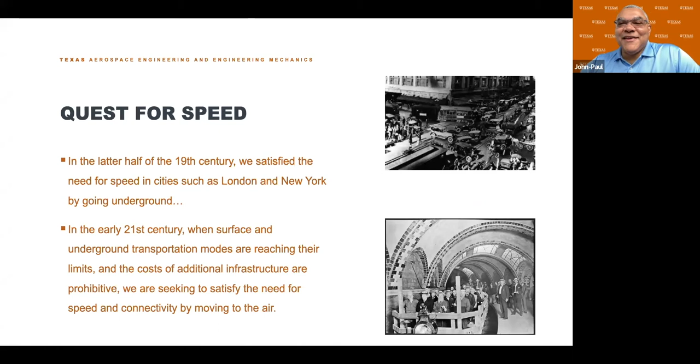Imagine how hard it would be to manage thousands of vehicles flying over your local city, everyone not only transiting people but cargo, with everybody wanting their different packages delivered. The companies that operate them are going to need similar back-office infrastructure like airlines do, for maintenance of their vehicles, to make sure that if something happens the passenger gets reaccommodated, or the cargo gets to where it's going.

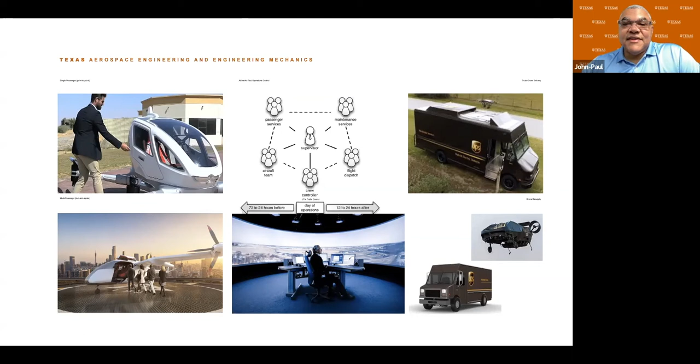So with that said, I won't belabor that, because I want to talk about what we're working on. I'm going to summarize the grand challenges associated with advanced air mobility—these are the grand challenges I testified to Congress about back in 2018, I think. These were, for me, the big grand challenges.

First, we're going to need greater autonomy in our aircraft. I cannot imagine having enough trained pilots to operate all those vehicles with passengers in them. So either you reduce the training requirements on the people who operate the vehicles, or you go fully autonomous. Either way, there's going to be greater autonomy in those vehicles. And certainly in the cargo realm, you want it autonomous, because otherwise you can't get the economies of scale.

Air traffic management will require greater autonomy as well. I don't know how many of you are au fait with air traffic control, but every aircraft that's up there has a human on the ground monitoring it, via radar, intermittent reports from the aircraft, or broadcast ADS-B. There's a human monitoring one or more aircraft for every aircraft in the air.

And so now that we're there, I'm going to ask, what is autonomy? So most people consider a system to be autonomous if it can complete the specified task without human intervention. So you tell a system, I want you to do this, and it does it. This definition implies that the focus of autonomy is on action, so you define autonomy based on whether the system can act independently.

Now, my rule of thumb is that these operational decisions are being made with rules prescribed by the designers of a system and proven to be performed in a specific manner under specific operating conditions. But if you think about what autonomy really is, it's the state of being self-governing. And self-governing is not just doing what somebody else tells you to do, self-governing is being able to decide for yourself. So self-governance requires more than just autonomous operation, i.e. just I programmed you, you go and do what I tell you to do, and you follow the rules slavishly. What self-governance means is that you can make autonomous decisions, you can learn from your experiences, and you develop your own set of rules based on your journey through the experience of life.

So one way to test is what I call the 3 o'clock in the morning test. Assume somebody wakes you up at 3 o'clock in the morning and they describe the internal state and the external operating condition of an autonomous machine. And they ask you, what will a system do? If you know the answer, that's autonomous operation.

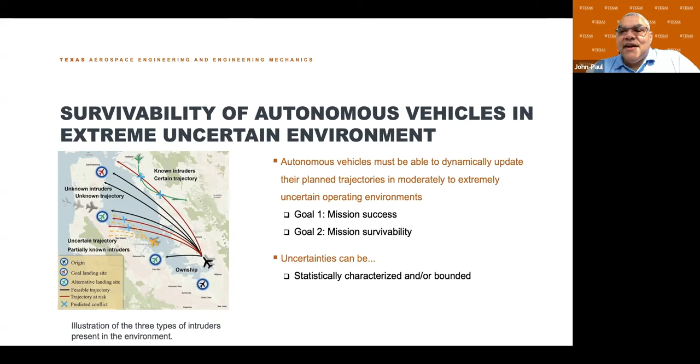And the uncertainties can be the usual thing—they can be statistically characterized or bounded for things we have data for. But there's some things that are really unknown, unbounded. Who's going to tell whether Lavanya decides she wants to go from Stanford to Berkeley, for example, to give a talk—assuming Lavanya would, I can see Lavanya, I can't see anybody else, I'm picking on her.

If we go from Stanford to Berkeley, for example, it's not known—you could try coming up with a distribution for that, but it doesn't really make sense. So there are known unknowns, and there are unknown unknowns. I know I sound like Don Rumsfeld there, but the fact is we do have those.

So we need to be able to plan for these. We need to say, if a link in my network gets blocked, I need to always be able to find somewhere to land, because I don't have infinite power in my vehicle—whether you're using batteries or other kinds of fuel, there's some limited capacity in how long you can stay up.

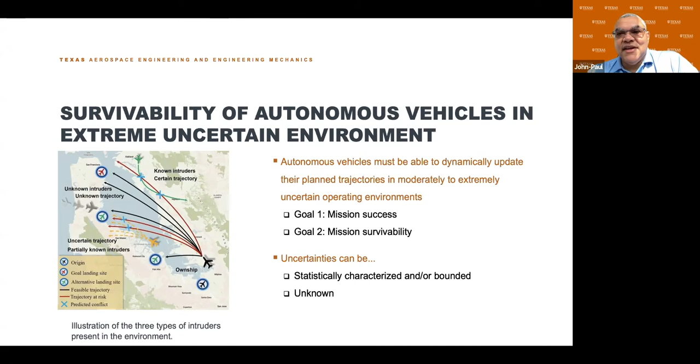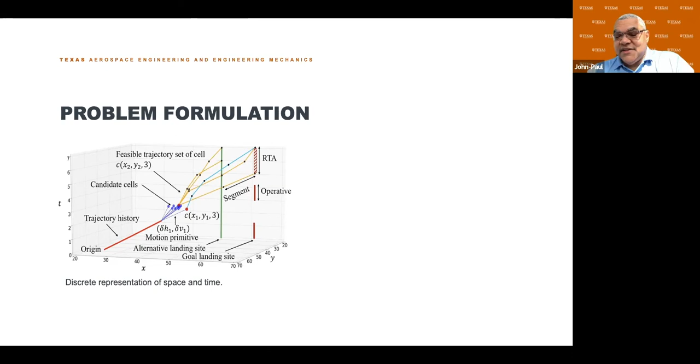Given some motion primitives that capture the dynamics of the vehicle, the idea is to figure out the best path so we have a sufficiently high guarantee, a probability or expected value, that we can always reach an alternate. You'd like a path you're 100% certain will work, no matter what happens, short of the engine failing entirely, within acceptable uncertainties on your vehicle side and exterior to your vehicle. So the mission is to get to a goal landing site versus an alternative landing site, estimate the time of arrival, and know the vehicle dynamics, whether partially known or not.

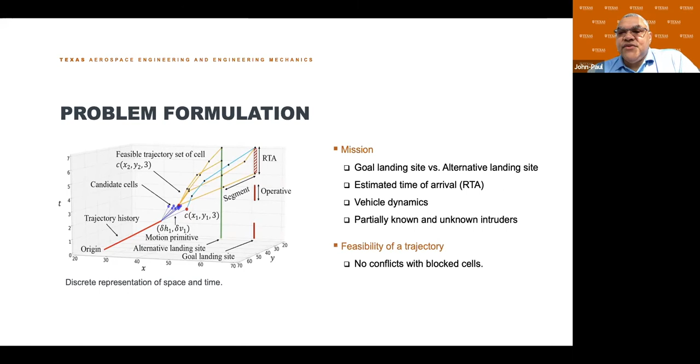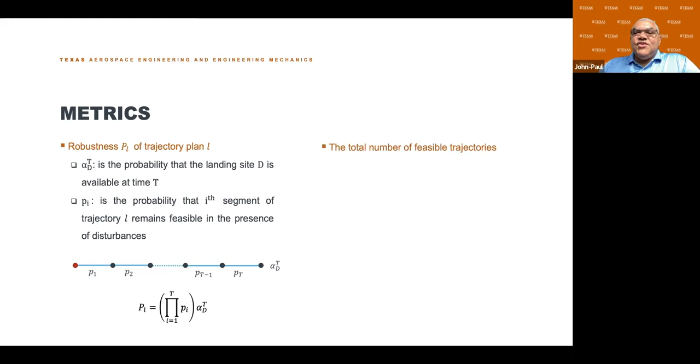We looked at the feasibility of a trajectory, basically whether a cell is blocked or not. One metric is the robustness of a plan, L. We define alpha dt as the probability that the landing site D is available at time t, and pi as the probability that the ith segment of the trajectory remains feasible in the presence of a disturbance. With that, we can look at all the segments along the way and the landing sites, and calculate the probability that everything is clear, which is a measure of the robustness of a plan.

We can also look at the total number of feasible trajectories. When you don't know anything, having more options is good, though not if you have more of the same option, since that doesn't buy you anything. The options should be diverse, and given diversity of options, the more options you have, the better off you are to deal with general uncertainty. That's a premise we explore.

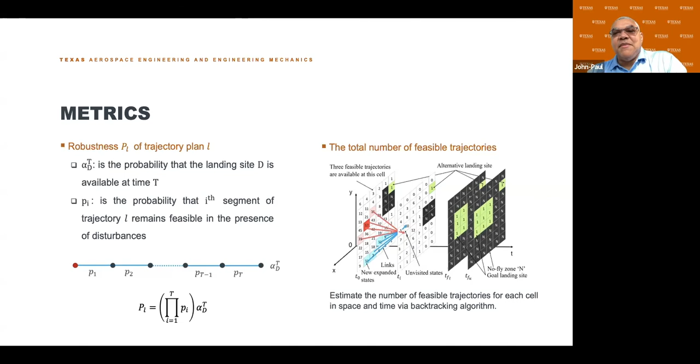So one thing we look at here is, as you step through time and look at the trajectories through the network, you can figure out how many paths and options you have at every time step, and use that as a measure of your trajectory's feasibility.

Looking at mission success versus survivability, given a point in space and time, we measure the probability of mission success or survival. Consider a set of trajectories L, which are trajectories that terminate at the goal or reach a landing site. A mission is deemed successful if there's at least one feasible trajectory that reaches the goal landing site. It's survivable if there's at least one feasible trajectory that leads to either the goal landing site or an alternative landing site, so you have some way of getting there.

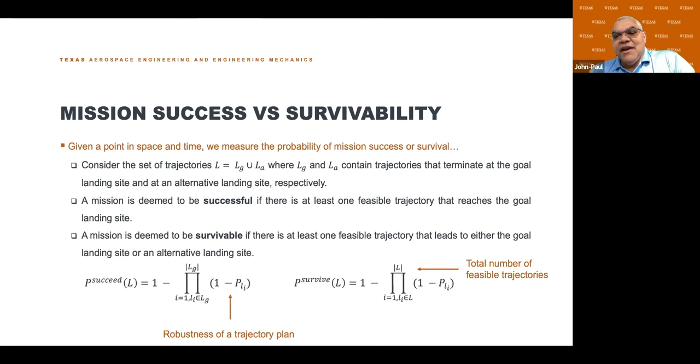Looking at both of these relatively straightforward metrics, we looked at different policies: a policy to maximize the total number of feasible trajectories, where feasible means you could potentially fly it; maximizing mission survivability, which comes with some weighting of the probability that things are blocked versus not; maximizing the robustness of the trajectory; and maximizing the average robustness of the trajectory, which is an uninformed baseline where you just assume things go as expected.

We did some simulations and found that as you increase the total number of vehicles, survivability is a key policy. Maximizing survivability makes a lot of sense, especially at lower levels of traffic. However, as you get to higher levels of traffic, maximizing the number of feasible trajectories makes more sense, in large part because it's about being able to respond quickly to what's happening. As you increase the number of unknown unknowns, it also makes more sense for the policy to focus on the number of feasible trajectories rather than survivability.

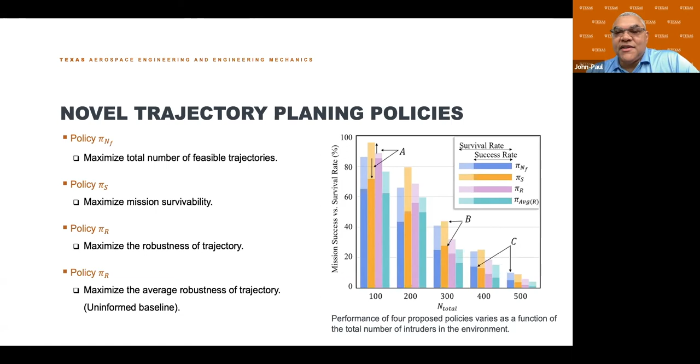So we looked at this, looking at the number of partially known intruders. NP is the number of partially known intruders. As you can see here, performance as the number of partially known intruders increases, while the number of unknown intruders is kept constant, mission survivability still outperforms everybody else.

So what does that tell you? That tells you that if you know something about the vehicles you're going to be flying through, it's better to use mission survivability. Use the data you know, use the statistics you know, come up with a good estimate of what the mission survivability is and plan according to that. So I hope that makes sense.

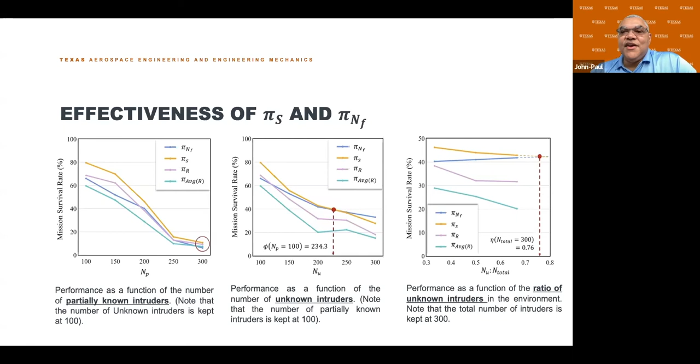Now, if you increase the number of unknown intruders, the people who just randomly pop up, at some point all of that planning to counter the things for the people you know something about doesn't make sense, because there's just so much uncertainty that you end up just saying, I need to have more options available. So you can see this working out quite well, and as the number of unknown unknowns gets greater, you want to just go back to having as many feasible options versus computing a more complex feasible survivability measure.

So that's some cool things that I think are a good policy we should be following as we think about trajectory planning. And by the way, this extends also to larger aircraft flying around the world as well. So this exploration of problems associated with urban air mobility or advanced aerial mobility could be useful at the larger scale of aviation as well.

Now I'm going more slowly than I thought, so let me speed up. I'm going to talk briefly about landing, one of the other big challenges in aviation: how do I decide whether I should land or abort my landing? One of the things we think about is the risk of missing the runway, but there's also a risk if I decide to do an aborted landing of running into a mountain or something.

And so typically the way we achieve the desired level of safety is not by putting everything on the vehicle, but by using stuff on the ground, using the humans, using the vehicle automation, all together to achieve this level of safety. So it's really a combination of capabilities rather than just making my vehicle totally autonomous.

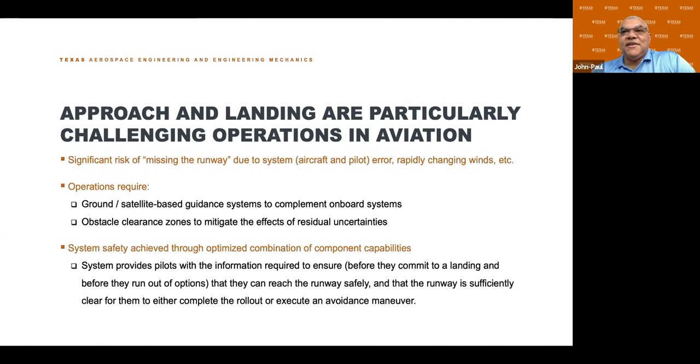So one of the things we want to say is, if we're going to take the pilot out and rely on the vehicle to make decisions about when to abort, how do we do that? One of the things we notice about the way we do missed approach or aborted landings in the world is that if our capabilities on the vehicle, on the ground, and the capabilities of the pilots are better, we allow the aircraft to go lower and closer to the ground before having to make the decision to land.

And the reason is because we know where our aircraft is with greater certainty, because our instruments are better calibrated and have better performance, and our pilots are specially trained. So we go from run-of-the-mill pilots who can probably only do Cat 1 or Cat 2 landings, to very specially trained pilots who can do Cat 3C landings, which is basically landing in no visibility.

And so the thing I want to take away from this picture, and in the interest of time I won't belabor it, is that each of these different categories of landings comes with a commensurate improvement in the training of the pilots, in the performance of the system, and in the calibration of the system.

It also comes with procedures, like you keep the aircraft on the ground further from the runway if you have a Cat 3 landing than if you have a Cat 2 landing, because you want to make sure the ground equipment has no possibility of interference, right? Because there's no visual cues outside to confirm whether or not there's interference.

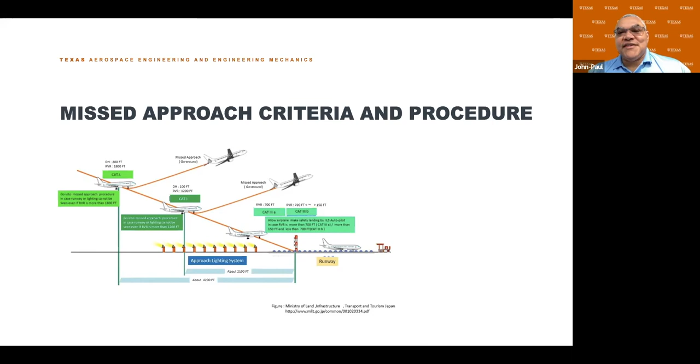The key thing about it is these decision heights are based on literally, when do you need external information to confirm that your internal systems are actually indeed operating well enough? That's the key thing to take away. And so ceiling and visibility are dependent on the precision and reliability of the instrument landing system at each airport.

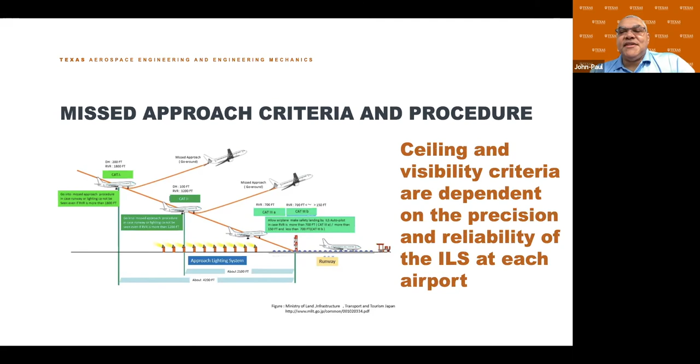So why are they so important? Decision heights are basically the point where endogenous uncertainty is so large, i.e. all the uncertainty internal to your system, that a successful landing can no longer be guaranteed.

And what we do with the visual confirmation is to say, okay, I can see the runway, I can see my aircraft, my instruments are good, I can continue my landing, right? And so the better you are in terms of your endogenous uncertainty, the lower it is, the closer you can get to the runway.

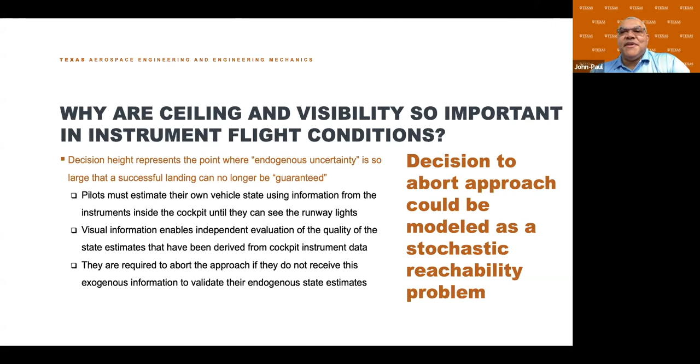And so if you think about the problem like that, you can think about it as a stochastic reachability problem. And then you can actually do some rare event sampling techniques to help speed things up there, so it's not brute force, and I won't belabor that.

And so the issue then is, how do we deal with certifying an autonomous system for that? If you think about it, what we're certifying in that landing problem is the pilot's decision about when to stop doing something because I don't have an alternative, right? Because you want to go as close to the ground as possible, but you want to keep going as long as you're able to get out.

And so there are airports in the world like Queenstown in New Zealand where the airport is in a valley. Before you had precision guidance systems, you had to be able to see the airport before you descended into the valley, because if you aborted in the valley, there was no way to get out. Now with RNP, you can actually go into the valley and get close to the runway because there's a way out.

And so the point I wanted to make about landing problems, and this is kind of related again to that trajectory planning problem I talked about before: in aviation, you only go as long as you can, as long as you have an alternative. The moment you're about to lose your last alternative, that's the time for you to abort a mission, unless you're 100% certain you can do the rest of it, which is what you do when you look out the runway and basically say, I can see the runway, I'm 100% certain I can land.

And so this decision height, we actually developed a model for thinking about how an autonomous system would make the decision based on its endogenous uncertainty, information that it receives from GPS broadcasts, from intermittent communications from the ground, all the different systems, to figure out when an autonomous system should make a decision about aborting the landing.

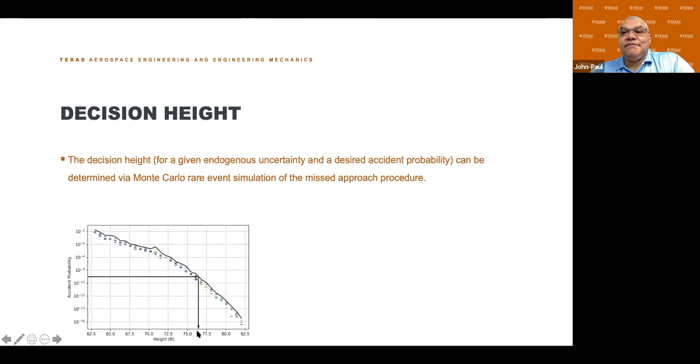And then you can look at different uncertainties, whether or not your communication system might go, or whether or not your GPS might lose a signal, or whether this particular thing in your aircraft might go. And you can develop decision heights based on this, and this becomes your decision criteria for your aircraft.

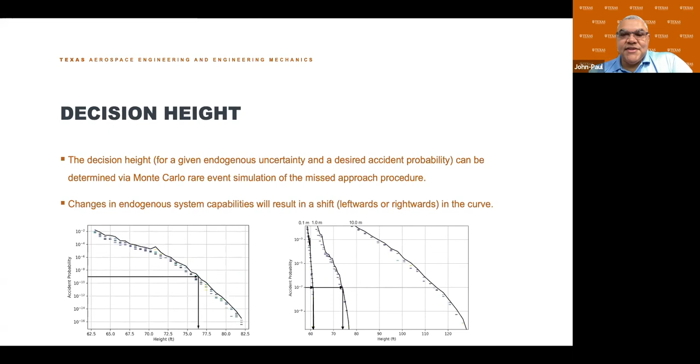Now, the last thing I wanted to talk about is certification, and I'll be quick. I'll start by saying certification is really hard.

It's difficult because the world is stochastic, and we cannot enumerate a finite set of conditions to prove things. We cannot guarantee that the system will make optimal decisions because it's going to be a learning system. But the question is, are there things that we can learn from how we certify humans?

Humans are inherently autonomous decision makers, and yet we certify them all the time. Here's one example the parents on the call might appreciate: certification of your kids. Mine are 14, so I'm somewhere on this S-curve. You don't trust your kid to make decisions for themselves until you develop some understanding of their decision-making capabilities, and you develop that trust before giving them authority to operate autonomously. I hear driving is the ultimate test, but I'm still waiting for that. The bottom line is you need trust as a leading indicator for whether you're going to allow your kids to operate autonomously. And I don't think any parent ever fully trusts their kids.

So there's always a little trust deficit, right? But you get to operate 100% autonomously at some point. So the fact is, you don't have to be 100% trusting to let some system operate autonomously.

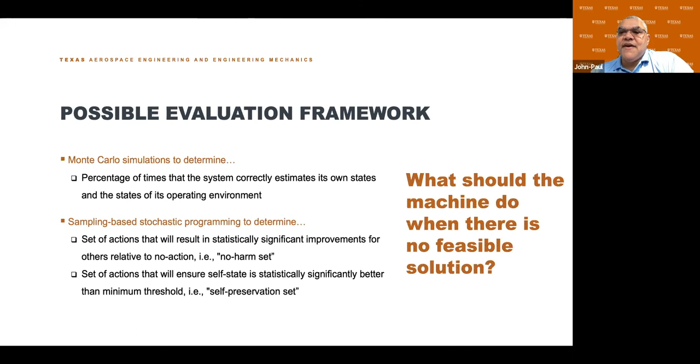We have to determine a threshold that we are willing to trust. Is that 95% confidence? There are whole legal issues around that, but I think we have to think about this from a Monte Carlo framework, a sampling framework, a low frequency event framework. What should the machine do if there's no feasible solution? Well, always make sure you preserve an option. Otherwise, we basically turn it over to some appropriately trained, evaluated autonomous agent, the pilot or the ground system, to make an appropriate response. So with that, I'm going to stop and say: advanced air mobility is here.

As Lavanya said, it's all over the place. There's so much activity. Autonomy is a key enabler. Full autonomy requires autonomous decision-making and autonomous operation, and certification is the big challenge. I think we in OR have a key role to play there, both from the management science and the operations research side. So let me stop there, and I'm sorry for going over so long, but hopefully it was useful.